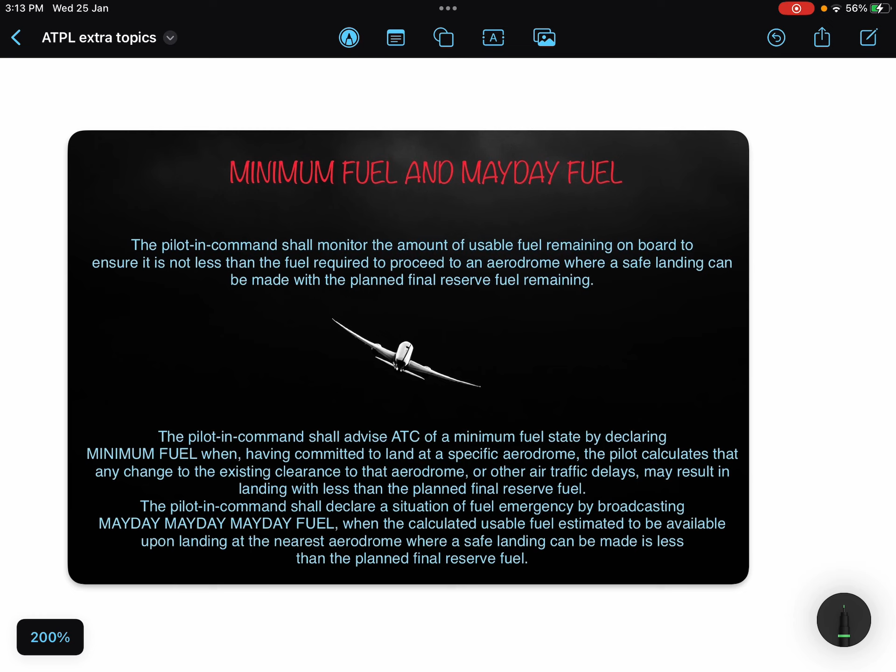So first things first, we will talk about mayday fuel. What is mayday fuel? But before that, we will talk about how much fuel a jet aircraft carries with it, right? A jet aircraft carries, let's say it is departing from an airport called Alpha to Bravo, right? And let's take a Charlie airport, which is an alternate airport, right?

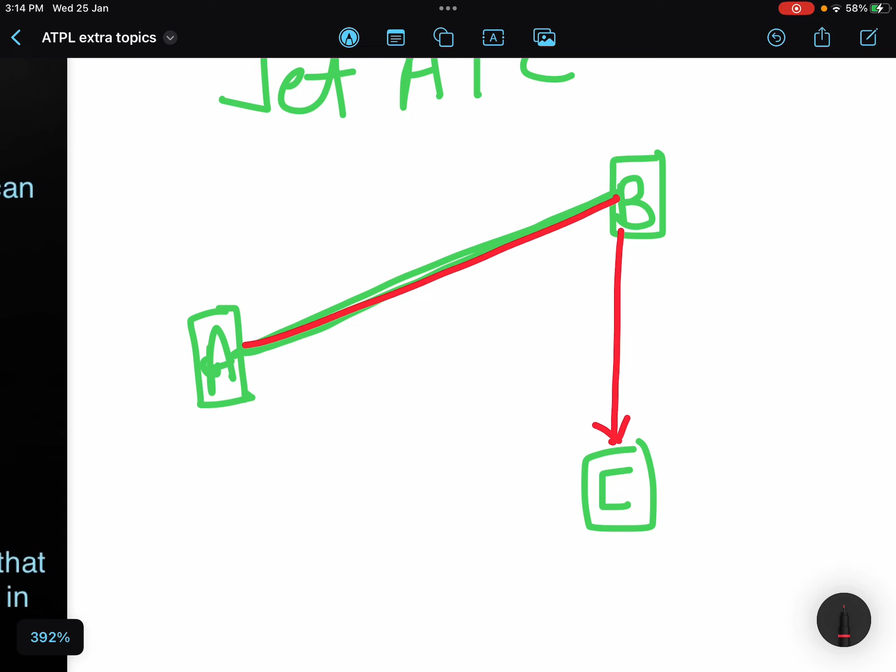So every jet aircraft carries trip fuel from Alpha to Bravo, then alternate fuel to its alternate airport, and then 30 minutes of holding fuel over the alternate airport. So Charlie is the alternate airport, so 30 minutes of holding fuel over Charlie at specifically 1500 feet above ground level, right? Because the fuel consumption at lower levels is higher than at higher altitudes, right?

Plus after this, 5% of trip fuel as contingency fuel. We are taking some figures, like from Alpha to Bravo. Let's say your aircraft burns 3000 kg, right? Normally an Airbus A320 during cruise burns almost 2400 kg of fuel, but we are calculating takeoff and landing phase and everything. Rough figures are, in a 1 hour flight, the aircraft burns 3000 kg of fuel.

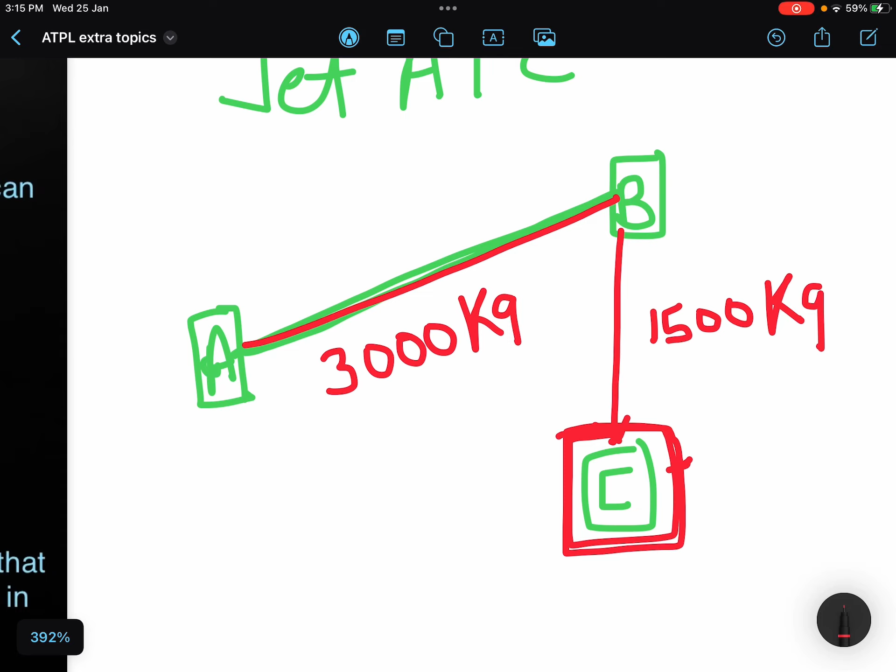Then alternate fuel to Charlie, let's say the aircraft burns another 1500 kg, right, to the alternate airport. Let's say the distance from Bravo to Charlie is half an hour, so we are taking 1500 kg. Then 30 minutes of holding fuel over Charlie, so it is again 1500 kg of holding fuel.

After that, aircraft need to carry 5% of the trip fuel as contingency fuel to compensate for headwinds and some other factors. So let's take 5% of 3000. It will be around 150 kg, right? 150 kg as contingency fuel of 5% of trip fuel. Keep it in mind, it's not 5% of all fuel, but trip fuel. Trip fuel is from Alpha to Bravo only, right?

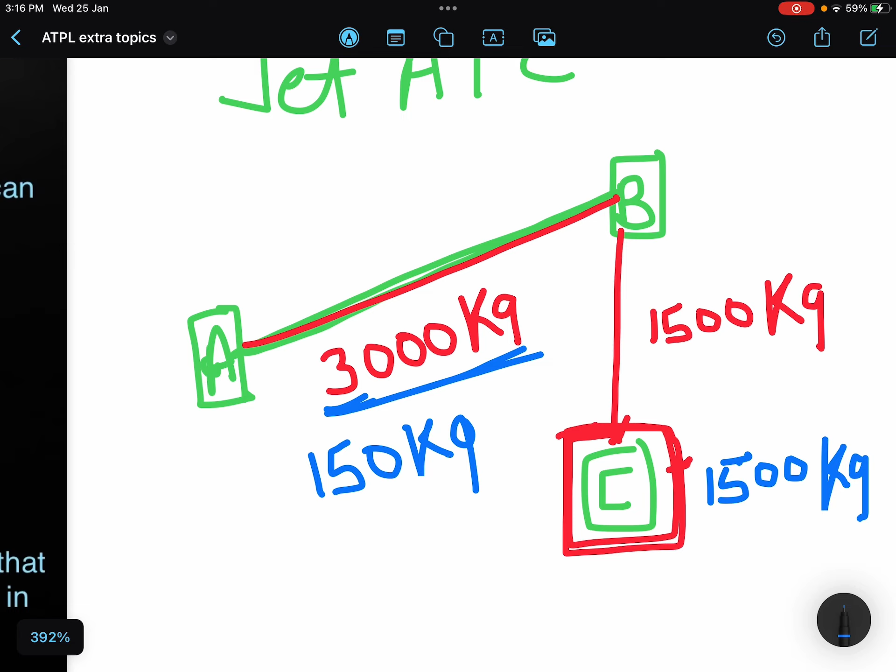So if we add all figures, 3000 kg trip fuel plus alternate fuel of 1500 kg, then holding fuel over the alternate aerodrome at 1500 feet above ground level, let's say the aircraft burns again 1500 kg, and then we take 150 kg as contingency fuel, right? So the sum will be around 6150 kg. This is the fuel this aircraft on this route should have in its tank. This is the minimum fuel according to regulations a jet aircraft should have in its tank, right?

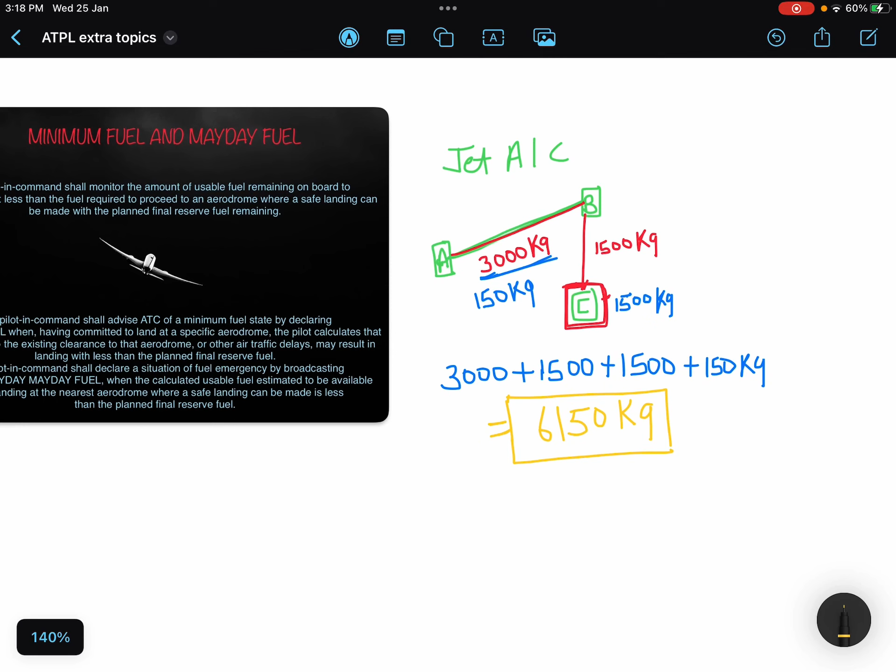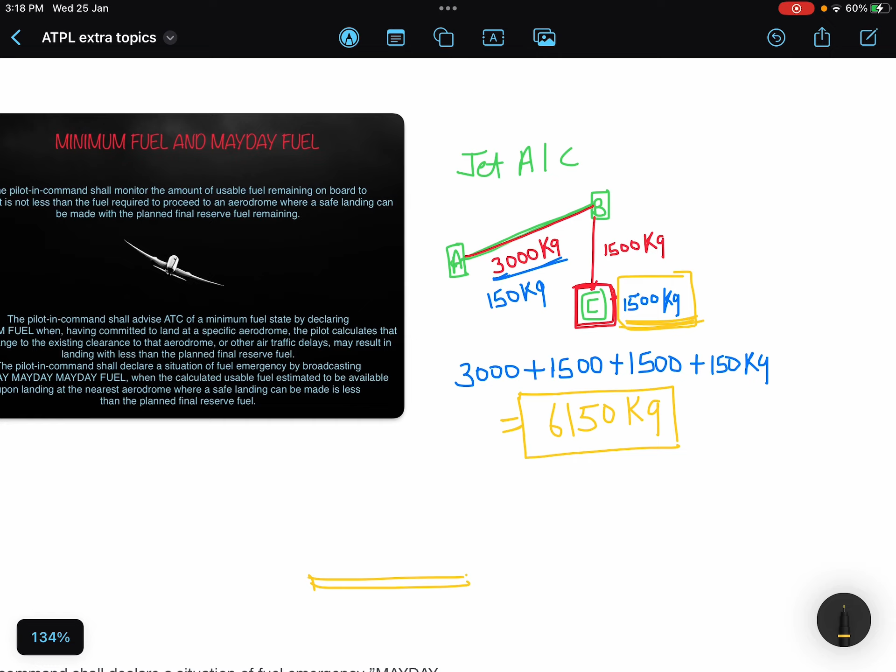Okay, when is it considered mayday fuel? The question starts from here. When is it considered that your aircraft is now on mayday fuel? Whenever you land at any airport with fuel less than the holding fuel over the alternate aerodrome, which was 1500 kg. Whenever your aircraft lands with less than this fuel in its tanks, it is considered mayday fuel. The term is that the final reserve fuel is less than it. Okay.

So what is mayday fuel? When the calculated usable fuel predicted to be available upon landing at the nearest aerodrome where a safe landing can be made is less than the planned final reserve fuel. There are some alien terms in it, but we will discuss the final reserve fuel a jet aircraft should have in its tank.

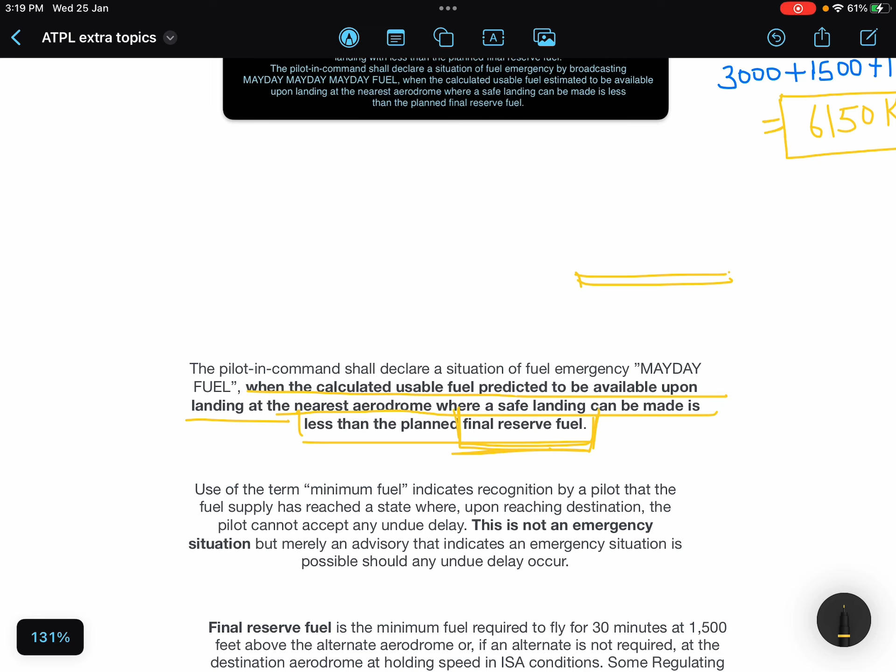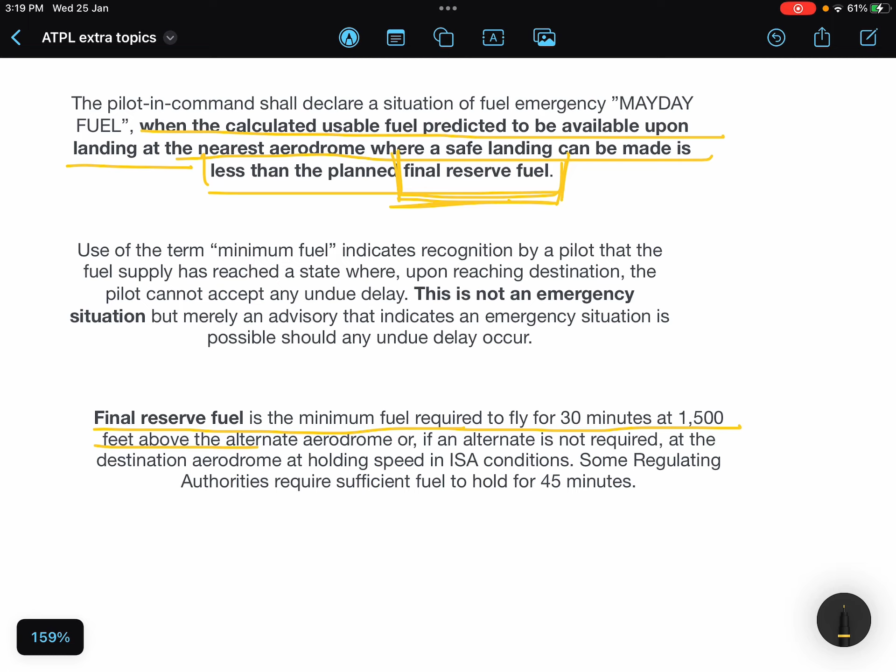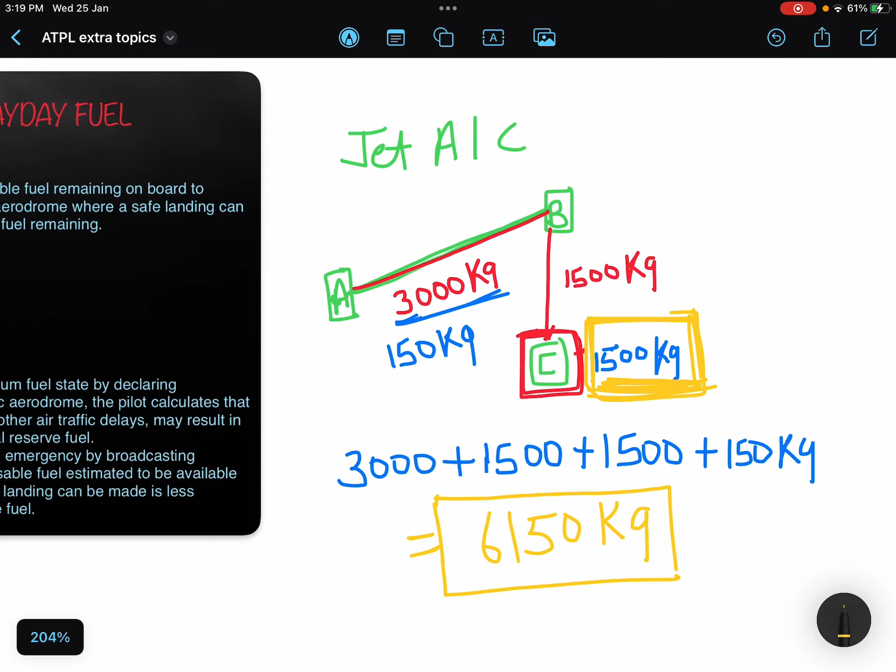What is final reserve fuel? Final reserve fuel is the minimum fuel required to fly for 30 minutes at 1500 feet above the alternate aerodrome. This is the same fuel we talked about here at Charlie, 1500 kg of fuel for 30 minutes of holding over Charlie. Whenever your aircraft lands at any airport and it has consumed this fuel, then it is considered mayday fuel. I hope I made it simple for you.

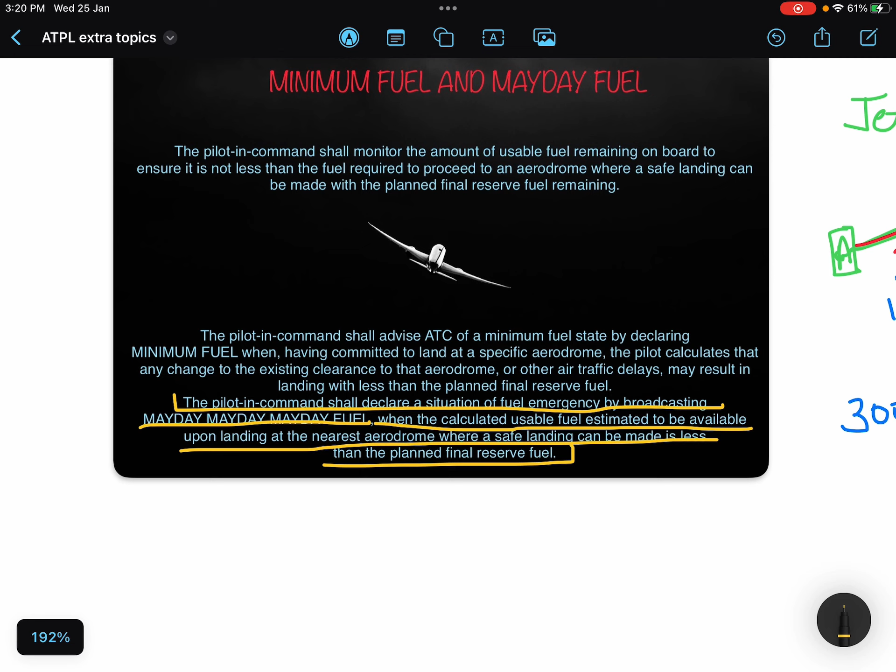Okay, the pilot in command shall declare a situation of fuel emergency by broadcasting mayday, mayday, mayday fuel when the calculated usable fuel estimated to be available upon landing at the nearest aerodrome where a safe landing can be made is less than the planned final reserve fuel. Planned final reserve fuel. What is planned final reserve fuel? We have talked about it, right?

Correct. Then another term comes, which is minimum fuel. What is minimum fuel? Okay, we'll try to simplify it. Whenever your pilot thinks or calculates that any further diversion or any further delay in the existing flight plan will, you know, cause you to use final reserve fuel.

Are you getting it? Whenever you as a pilot feel or calculate that if you make any changes from the existing flight plan or the routing, you are going to use your final reserve fuel, then it is considered minimum fuel to the ATC. And ATC will not give you further delays, so that you do not go on mayday fuel while landing, right? So ATC will try to give you clearance as early as possible and no further delays.

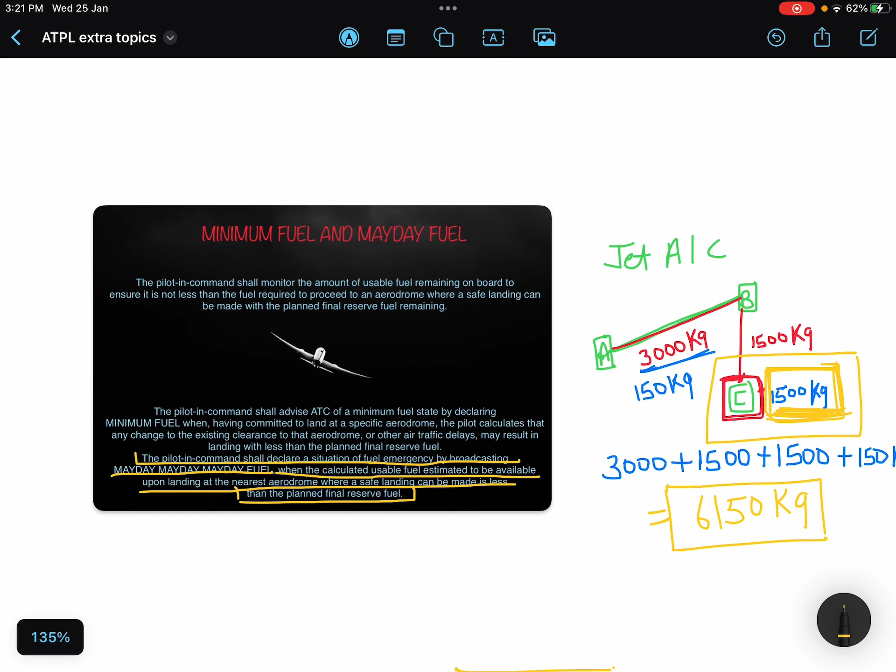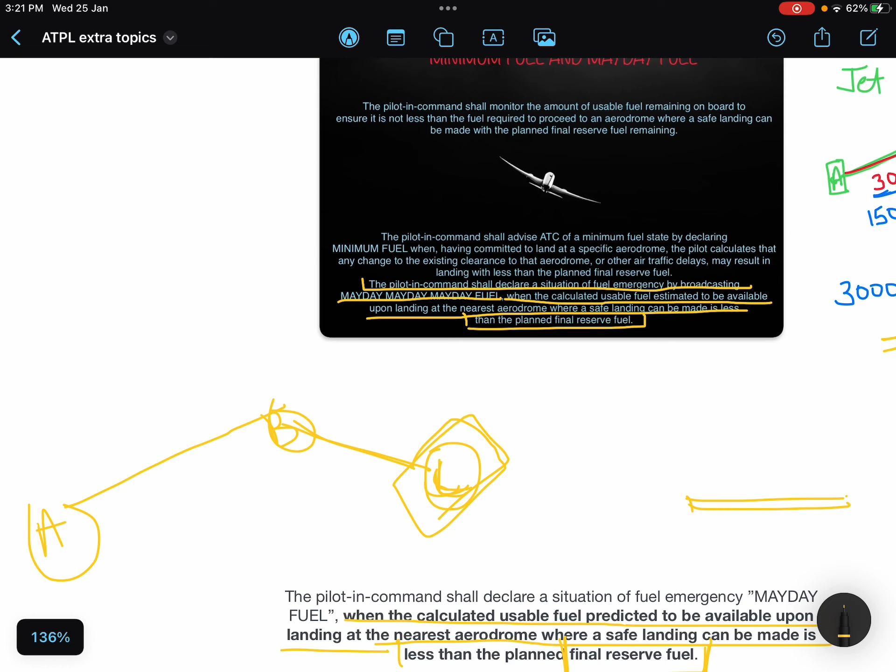Let's say you were traveling from Alpha to Bravo and you diverted to Charlie, right? If you hold over Charlie, then you will be on minimum fuel, if you are taking fuel just to the point, right? So ATC will not give you delays and will try to land you as soon as possible, so that you do not declare mayday fuel, right? So according to the explanation,

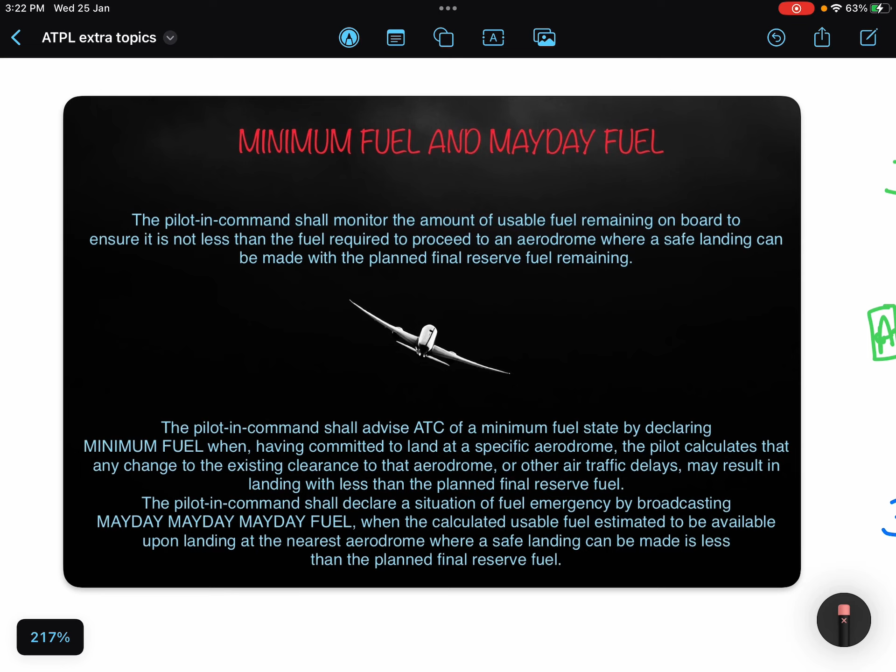the pilot in command shall advise ATC of a minimum fuel state by declaring minimum fuel when, having committed to land at a specific aerodrome, the pilot calculates that any changes to the existing clearance to that aerodrome or other air traffic delays may result in landing with less than the planned final reserve fuel. Right now your aircraft is not in a mayday situation, but any further delays will cause your aircraft to go into mayday fuel, right? I hope I was able to make it clear for you.

And I'm going to write here how much fuel a jet aircraft carries. Let's say it's an IFR flight, then fuel to destination. Just a second. Fuel to destination plus fuel to alternate, then 30 minutes of holding fuel at alternate at 1500 feet, plus 5% of trip fuel for contingency, right? So this is the fuel for IFR flight.

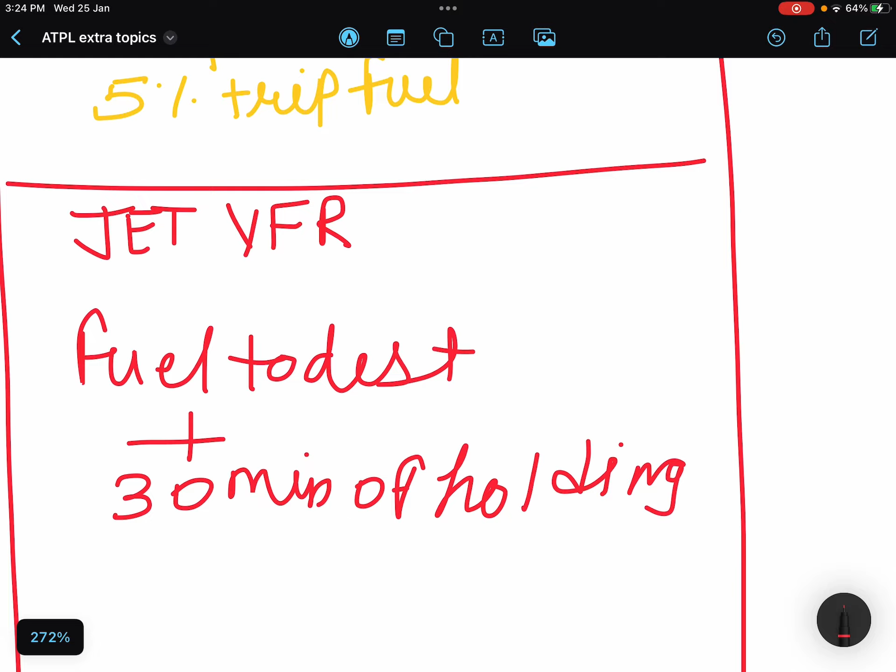I should write it here. Jet aircraft in IFR conditions. Now we will talk about VFR conditions, right? For jet aircraft only, VFR conditions. When alternate is not required, it's a VFR flight and you are not planning for an alternate aerodrome, then fuel to destination plus 30 minutes of holding fuel, right? Same, at 1500 feet, correct. So this is for VFR flights.

Now there is one more thing. When alternate is not available, let's say it's an isolated aerodrome, there is no alternate possible near this aerodrome, so how much fuel should a jet aircraft carry? So another case is alternate is not available. Fuel to destination, right? This is the minimum fuel you should carry, otherwise you should not depart, I would suggest, right?

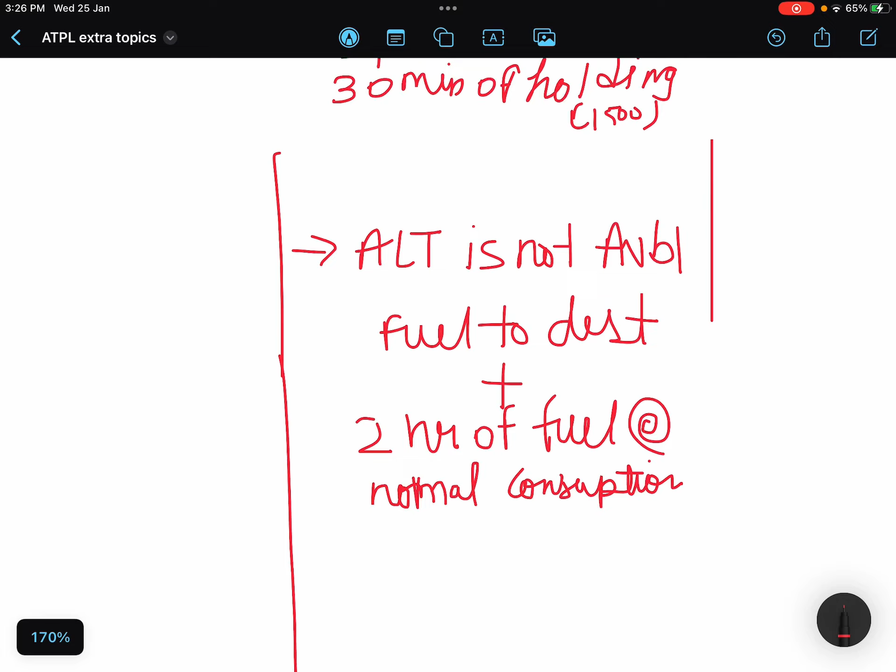Destination, then 2 hours of fuel at normal consumption, right? So this is the fuel you should carry. You can take a screenshot or whatever, right? This is the table for turbojet aircraft for fuel planning, right? I hope I was able to make you understand the difference between minimum and mayday fuel.